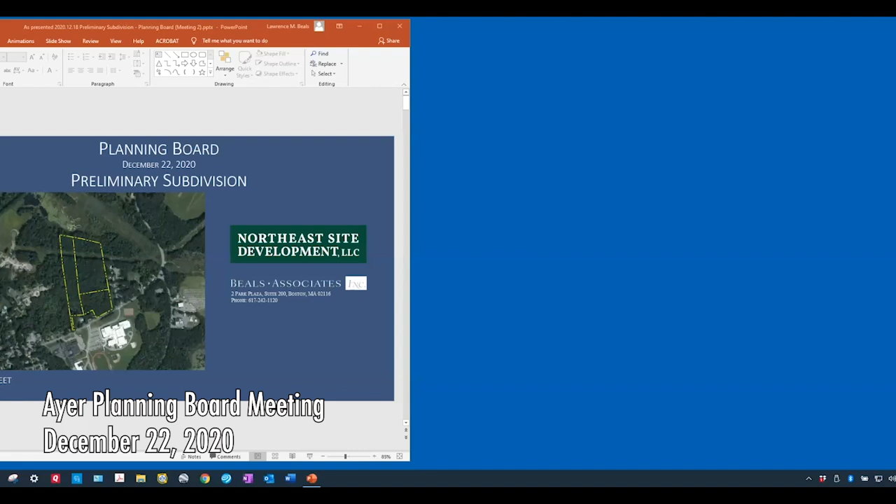Now you're on the spot, Larry. I know. Can you see my screen? No, not yet. There it is. Oh, it's coming up. Fantastic. Okay, so, may I ask why you're doing this?

You're sharing the screen because you have new and different information for us? A couple of reasons - as everyone recalls, we went on the site walk, and there was a lot of discussion on that site walk. So afterwards, we debriefed on the team and thought we should make some changes. We got some good information, so we've attempted to address information that was developed during the site walk, and we want to share that with you tonight, if that's okay.

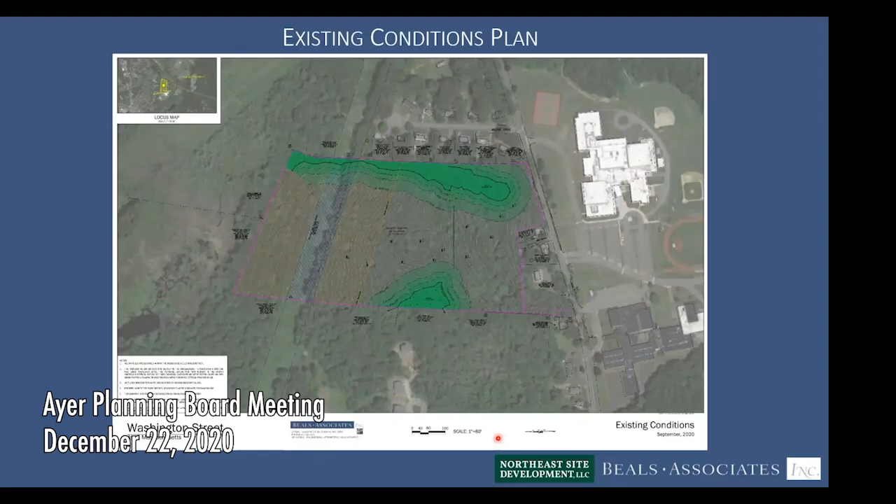I appreciate it. So I'm going to make this bigger, and then I'm going to grab a laser pointer so that I can point to things. For anyone watching that may not be familiar with the site, just a quick orientation: Ayer High School is located to the south of our property. Our property is outlined in yellow, all of the land within this boundary. There's a power easement crossing the northern portion, and a much larger power easement to the north that's not on our property. There's a residential subdivision to the east, some homes in the southwest corner near our site, and another residential subdivision to the west, barely visible from the property this time of year. So that's the site - let me blow this up a little bit.

We met in this parking lot. Well, it shows as a grass field. Since this photo was taken, this area has turned into a parking lot.

We walked across the street. We entered the site about here and traversed through the property. I think we got diverted a little bit over in this area looking at the rock. Then we went back across this knoll to where a tree stand was, came to the edge of the natural heritage boundary.

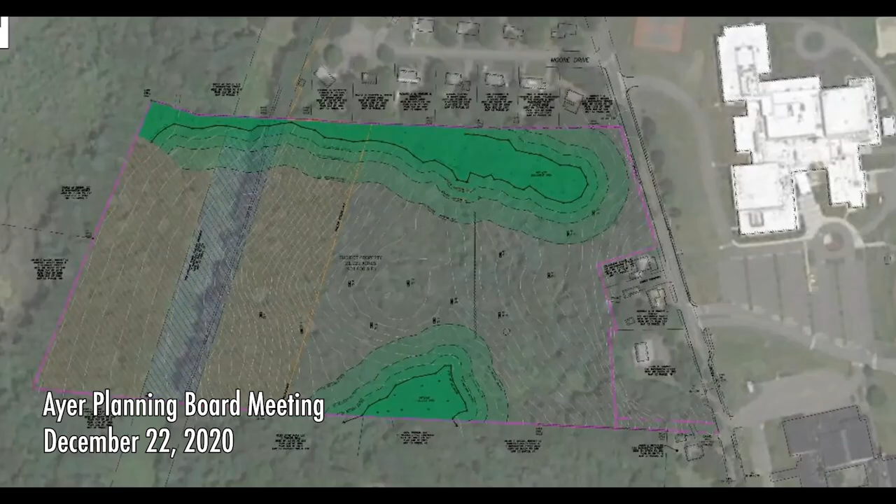We crossed the cleared power line easement, and then walked down into this area, which helped us all realize what an important open space area that is on the edge of the wetlands, and it's really quite attractive. And just for everyone's edification, you may recall we dug some test pits throughout the property. I won't go through that again, but we do have the information if anyone is interested.

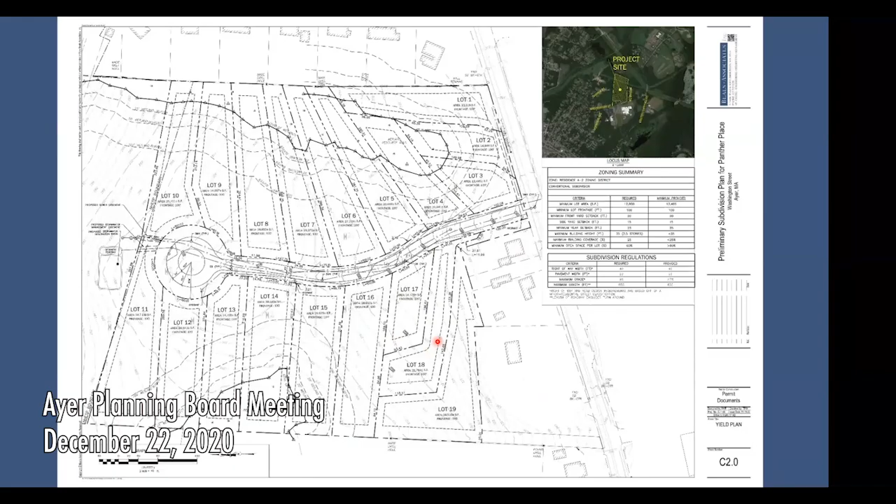So we went back to the drawing board and we produced this as a yield plan, which I'm pretty happy with because it closely simulates the cluster plan.

And this is the basic plan that's intended to calculate the number of lots that we can do by right. If you start here, that's lot 1, and it progresses around with a numbering system all the way to lot 19 at this location.

We have a cul-de-sac here and a cul-de-sac here. And the benefit of this cul-de-sac is we did away with the hammerhead lots that were located in that area, sort of irregular shaped lots.

I think this is a sensible layout. And what I like is it really mimics the open space plan.

We knew when we crossed that line, we walked for a way in the woods, crossed the cleared power line easement, and then made it down into that area. So that is the conventional, the cluster plan that we presented last time.

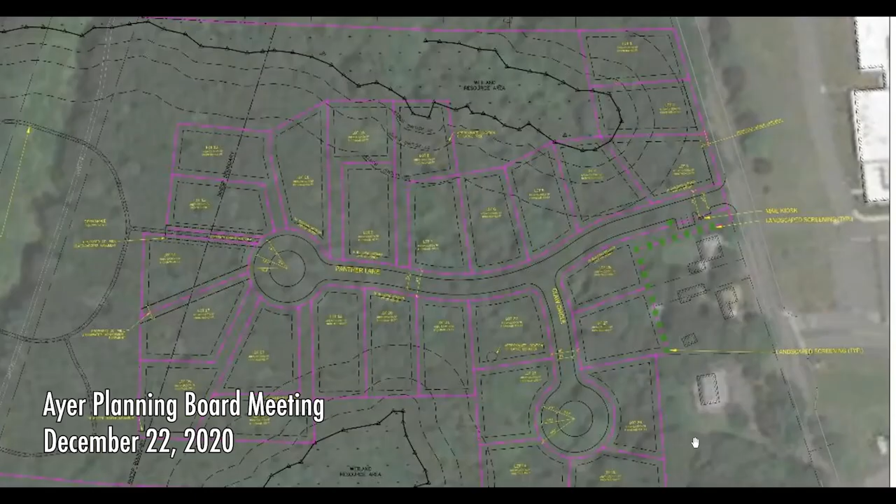Mr. Chair, may I ask a question? Yes, let me ask Mr. Beals, is it okay if we interrupt you to ask questions? Please, that's what we're here for. If we get off the track and you've got more to say, please let me know and we'll get back on track. But go ahead, John.

Mr. Krantz: I want to confirm that the image we're looking at now that says residential development layout, is this your revised base plan plus the anticipated density bonus units that you're requesting?

No, this is the one we showed you last week. This is not revised, but you added a trail to the back, a kiosk, and parking spaces at the front. I had this blown up - that's helpful, thank you.

Focusing in on that mail kiosk - we've actually got it labeled as a mail kiosk just to be certain. The way this would work is the mail truck would come in, pull into this space, and believe it or not, that kiosk is drawn to scale. It looks tiny on this drawing, but it's accurate, and these parking spaces are to scale as well. What does it have, 32 boxes plus 4, something like that? It doesn't matter, it's a typical mail kiosk.

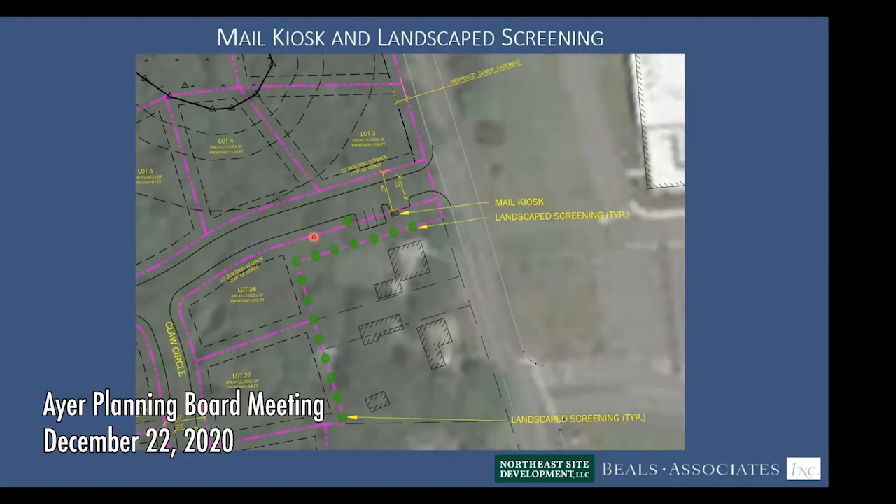We're also aware of the fact that there are existing homes here, and conceptually, we think it really makes sense to landscape that perimeter to create some screening. It was also recommended that this mail kiosk be lit. We're going to see if we can develop a solar lighting system that collects sunlight during the day and powers the lights at night. We think this is probably the best spot for that kiosk, subject to any comments the board may have.

Thank you. Moving on - was there a question? No, thank you. Okay, just Zoom lag, that's about it.

So this is a brand new plan that nobody has seen yet. When we were out on the site, there were comments that the other layout seemed to be crowding the wetlands, that the back of these lots tended to crowd those wetlands in that area. We went back to the office and thought, if we've got a roadway that's about that long, and we extend that roadway, then we can essentially make the lots fatter and more shallow. By extruding this roadway in this direction, it creates more frontage, and we can maintain the lot size but pull this rear property line closer to the roadway, and more importantly, farther away from the wetland resource areas. So this roadway, as shown on this plan, is about another 60 feet in length over what was previously shown.

Now, when I try to evaluate these things, you're probably trying to envision what the other one looked like versus this one. So just to refresh your memory, I can toggle between them, and this is what we'd like you to consider. It would require a waiver to go that extra 60 feet, but we think we can make a compelling argument justifying the waiver by pulling the property lines out of the resource areas. So this is what we had before, and this is what we're proposing for your consideration.

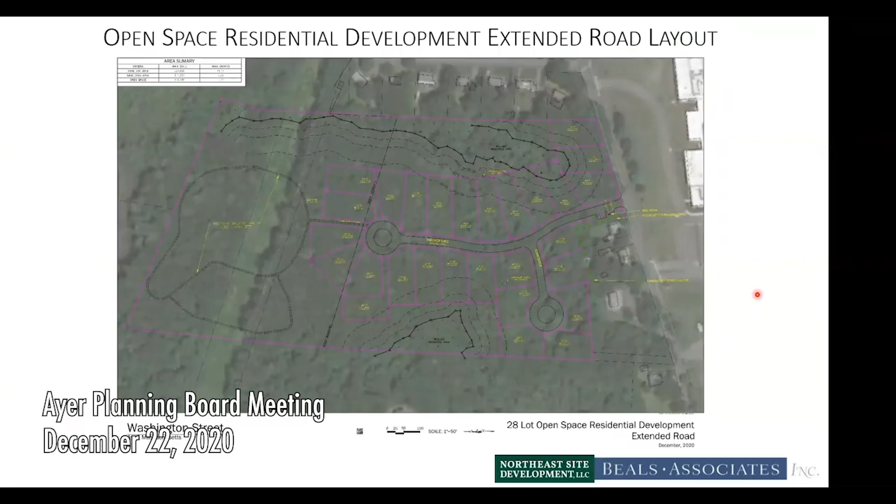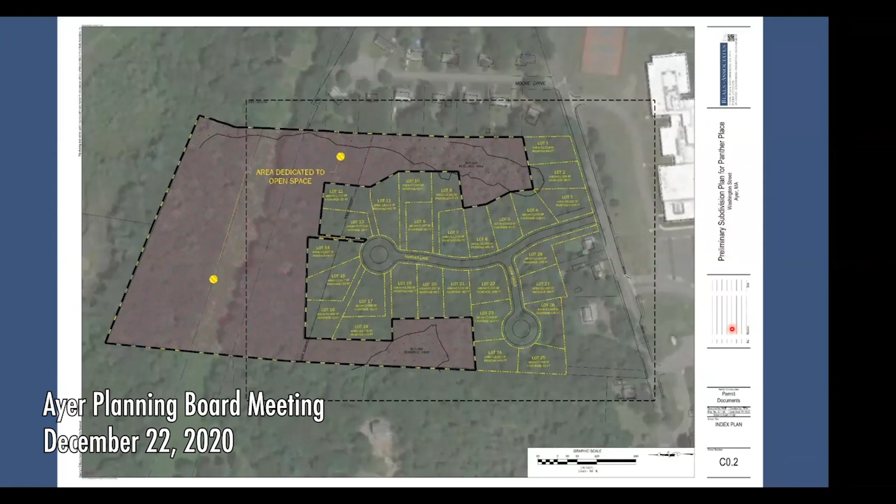Alex, you want to start this and then I'll finish it? 'Cause I agree with you, Mr. Levine, they're A&R lots. That's what I stated last time. Well, Alex, thank you very much for that comment. Alex can speak to the practicality of it. I can also, and I think you should stick with that. I don't think you should even go to Alex.

Well, what I could say, before we can agree to disagree as that cliched saying goes, is the new yield plan has 21 lots, which would, again, let's just agree or disagree on the A&Rs. If we agree that Alex was right, who I'd like to think is right, we can technically go up to 30. But let's just say we agree to disagree, then we're back to 28. So that's kind of how the issue can work its way one way or another.

That's what I was hoping you'd get to, because I noticed the count seemed to be the same, and I want to end up at that number, not you trying to push it to more lots. I'm not trying to pull anything personal, this is a comment as one board member only. And I appreciate that. I'm gonna, if you don't mind, sit here counting the lots on the revised plan that you put up.

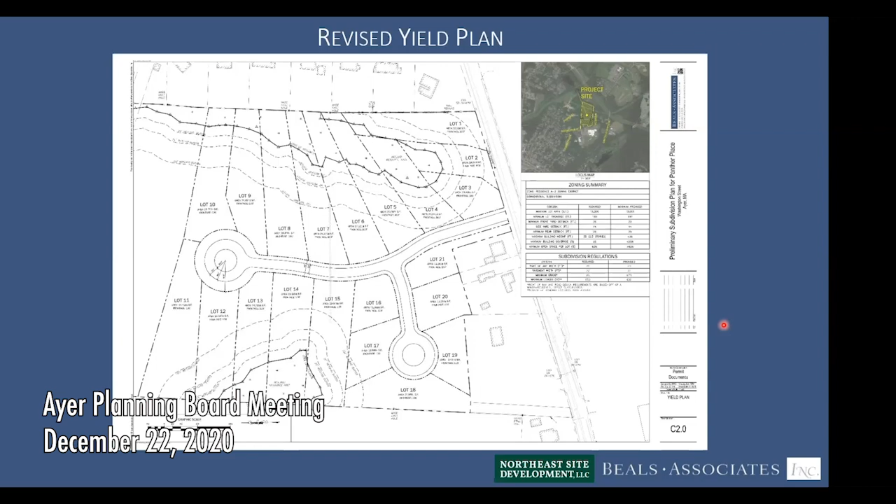Actually, can you, I'm sorry Mr. Beals, can you go, is that it? No, no, that's the original plan. Can you go forward to the revised OSRD plan, I'm gonna call it. Right, there you go. I believe it's 28 lots, is it not? Yeah, it says right at the bottom, 28 lot open space.

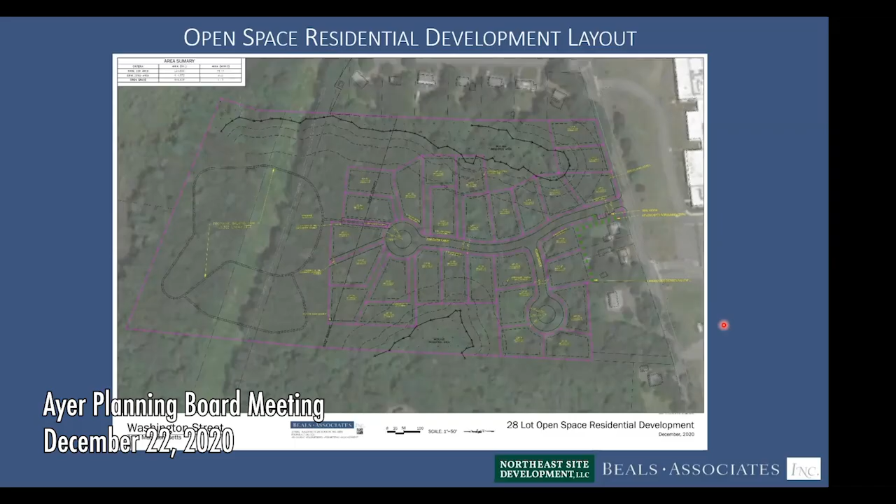Okay, so you have not increased the number of lots. You've changed, I'm gonna just paraphrase, go to the 64,000 feet, which is how I'm looking at this right now. You've changed the shape of the upper lots, the hammerheads, they've been changed. Yeah, this is not the latest version, this has no hammerheads. Larry, can you click? There you go, yeah, okay.

Pull it up if possible. This one looks more like a conventional subdivision.

No hammerheads. Correct. Boy, hammerhead lot—I had to ask my dad what that was when I was like 9 years old. He explained it to me.

So yeah, these are more conventional lots. It looks to me, and I can't say for sure without measurements or plans in front of me, that the boundaries on lots 1, 2, and 3 along Washington Street haven't actually gone deeper in. Lot 4 on the corner is now deeper into the wetland resource area. Lot 5 hasn't changed dramatically, and lots 5, 6, and 7 have stretched back a little bit.

I'm just comparing this on the piece of paper here with what's on the screen. The hammerheads to the left, which is 8 and 10, are missing. 11 is reshaped, 12 has been moved, but ultimately you're coming to 28 lots again, correct? Correct.

You described it before, I don't remember if it was at the meeting or while we were on the walk, how you came up with the approximate size of the lot based on how you felt the market—basically it made sense from a market standpoint. Put a house on a nice little elbow room lot and you're good to go.

So I'm assuming these are all somewhere in the 12,000 square foot area? Still, none of them are less than 12,000 square feet. Okay, great. I see you maintained the boulder, thank you.

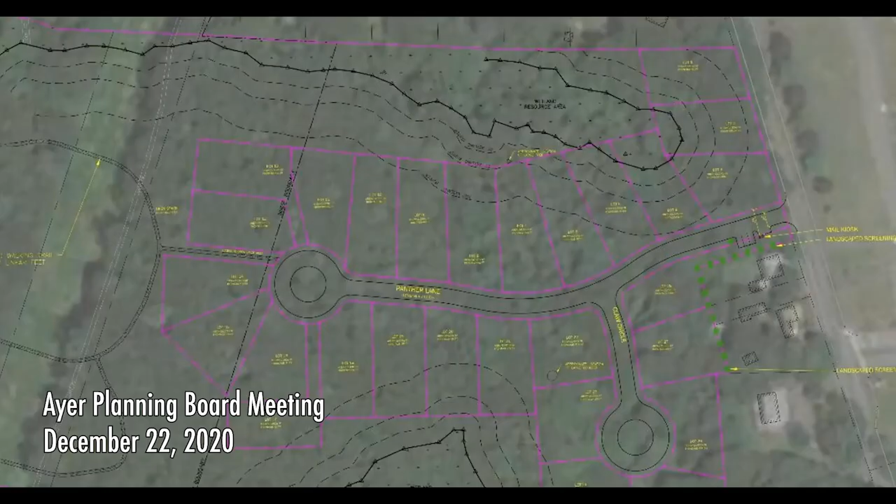What else was I thinking about? Also, in my staff report, I put out the idea of some of the lots having duplexes rather than single family homes. I think that would help provide somewhat more affordable housing - not affordable in the sense that meets the state's definition, but something a little more affordable to home buyers. It may enable some units to be doubled up on those lots, potentially taking pressure off other areas if, say, the Conservation Commission is adamant about that later. So I just wanted that to still be part of the consideration.

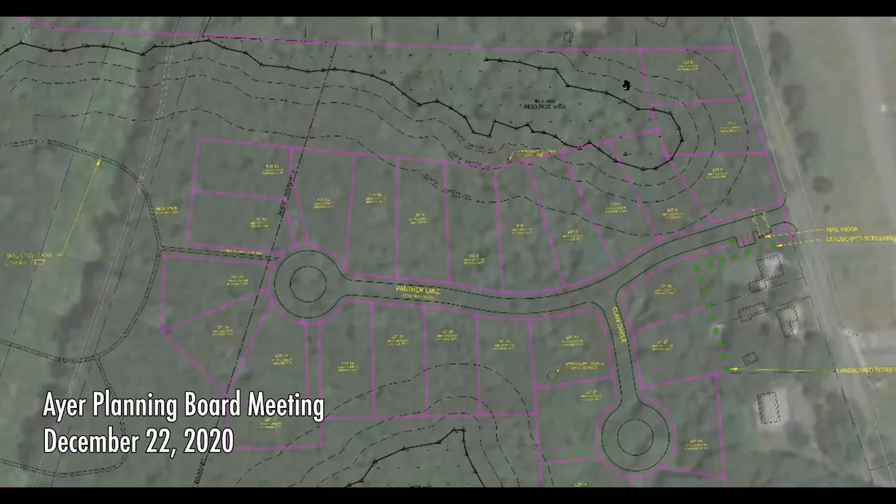Mr. Beals, could you stop sharing your screen, please? As the man running the meeting, I can't see anybody. Oh, that's weird. I have everybody on the side. Yeah, but it's not because everybody. Of screen sharing. I got everybody. There you go. Okay, all good. Right, now I can read the faces in the room. Thank you. So thank you, Mr. Diskin.

So yes, to just get that out in the open, as discussed previously, looking at this land and how this property should be laid out, and the kind of product that I like to build and I think people like that I build - I don't see any duplexes going here. I don't think it's appropriate. I don't think it's going to look right. I don't think it's the right place for it. I don't think it gets what people want. So I am not interested in doing duplexes. That's not what I want to do. What I'd like to do, I think the town is going to be really proud of. It's going to look really nice and fit into the neighborhood.

Thank you, I wanted to get it off the table, so I appreciate that. Thank you very much. And with what you said, Mr. Levine, I'm going to make one more request. Could you please include - we understand they're not the exact elevations you're going to have drawn - but in the plan, just include an elevation or two, as an exhibit in the plan. Again, giving us the tools we need to get the job done. No problem, thank you.

Any other questions or comments from the board? I want to make sure everyone else has got theirs done, and I got a couple more. Mark, you have anything? So, mute. Go ahead, Ken.